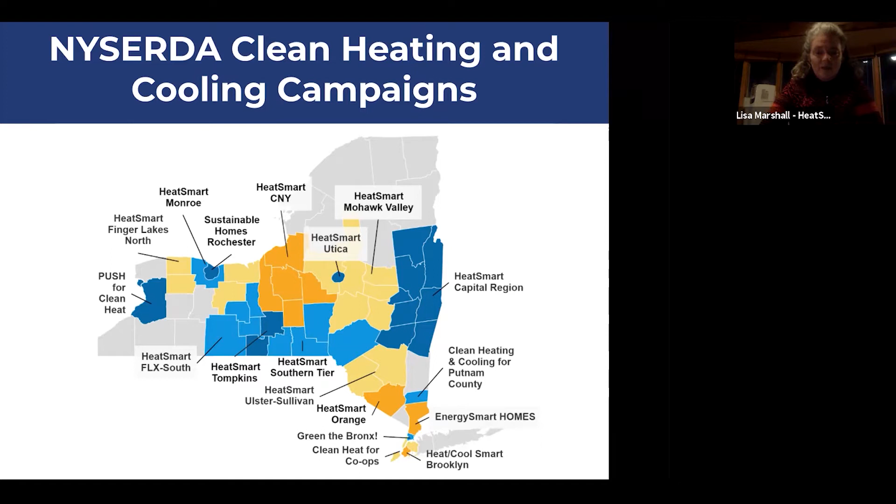There's now HeatSmart Finger Lakes South to the west of us, a brand new program launched last year, and HeatSmart Southern Tier, covering Tioga, Broome, Chenango, and Delaware counties. If you have friends in another county interested in taking part, we can help direct them to the HeatSmart program closest to them.

So why do we need a community campaign for clean heat? It's because we find ourselves in what some call the climate crisis or climate emergency, this rapidly warming atmosphere caused by ever increasing greenhouse gases. Those are the gases that, when we burn things like fossil fuels, go up into the atmosphere and get trapped there, trapping the sun's heat.

We need that greenhouse effect to keep the earth habitable, but the problem is we've been putting a lot more gases into the atmosphere in the past 200 years, and more each year, to the point where it's difficult for our natural systems to adapt. So as a society, a humanity, a state, a country, we all need to figure out how to reverse that trend of increased greenhouse gases and put less of them into the atmosphere.

Here in New York, we passed a law last year called the CLCPA, the Climate Leadership and Community Protection Act. It requires us as a state to reduce emissions from all sectors by a certain amount by 2030, and by an even greater amount by 2050. The problem is no one knows how to do this, they've never done it before, so we're all working together to figure it out.

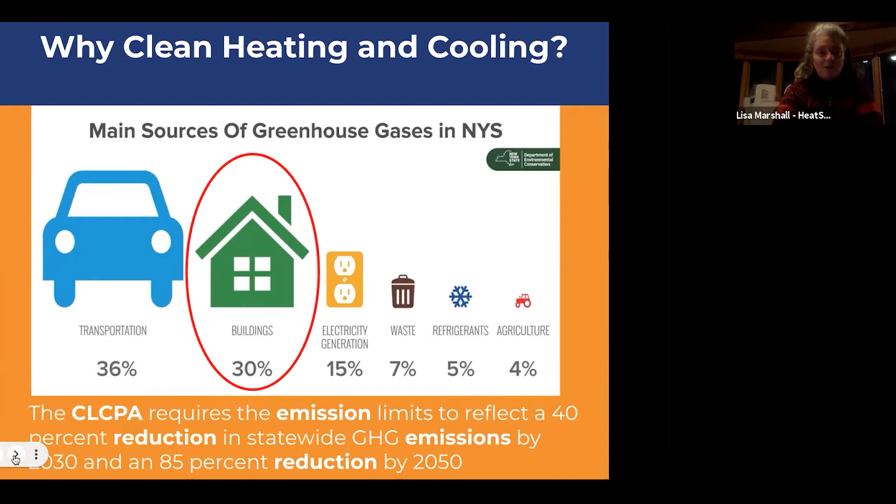One of the biggest sectors is our buildings, because on-site combustion of fossil fuels in buildings is, as you can see from this graphic, about a third of New York State emissions. So if we're going to reduce emissions from our buildings, we have to think about how we use energy in our buildings, because we have to heat them. We live in a cold climate.

It was nice that today was the first really chilly day of the year, and we had this webinar to remind us that heating season is here. If you haven't turned on your heat yet, you probably will soon. Most of our energy use in New York is for heating, with a little bit for air conditioning.

This graphic is from Minnesota, but it's not too different from New York. We also like to look at water heating, which is about 15 to 20% of our energy use. So heating and water heating are the two things HeatSmart mostly focuses on.

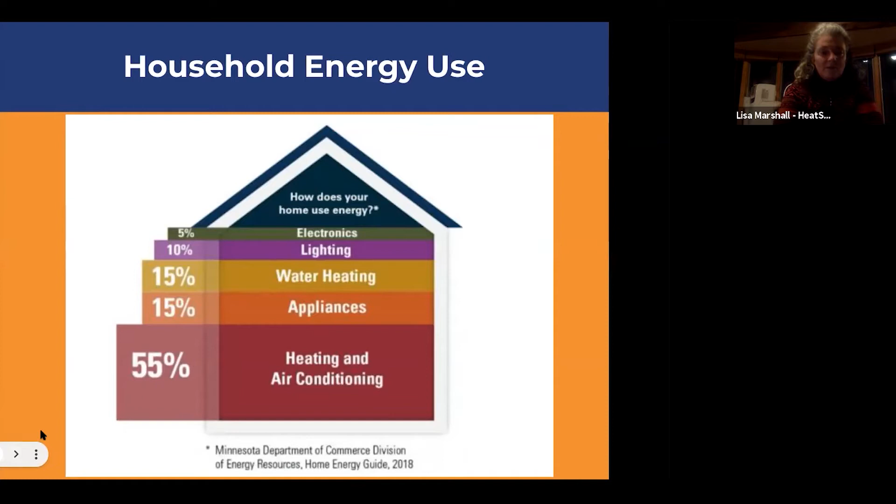So what do we recommend? We recommend having somebody take a look at your building envelope, that is, how well insulated and air sealed your home or building is. The reason is, if you have a well insulated and air sealed building, the warm air from your furnace, boiler, or heat pump will stay inside with you instead of escaping through the roof, ceiling, foundation, or wherever else it can get out. That's really important.

And then the main thing we like to talk about is how to do space heating and cooling, because the heat pumps we recommend are the most efficient way to heat your home.

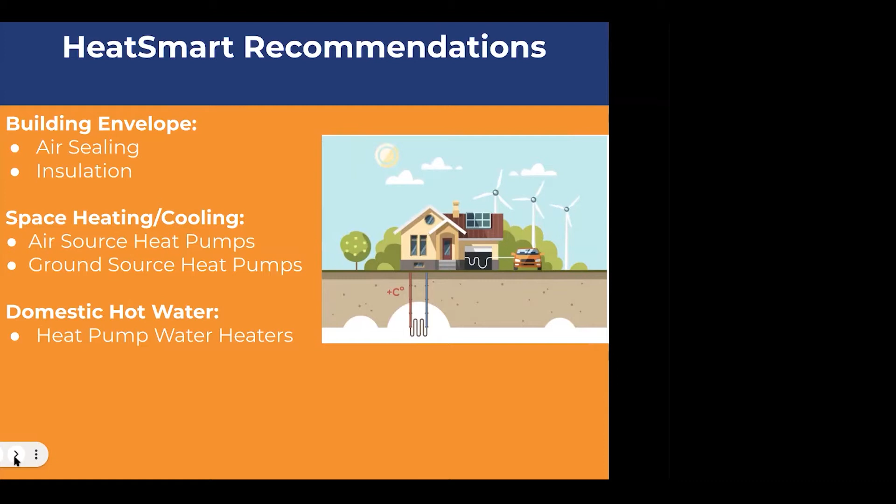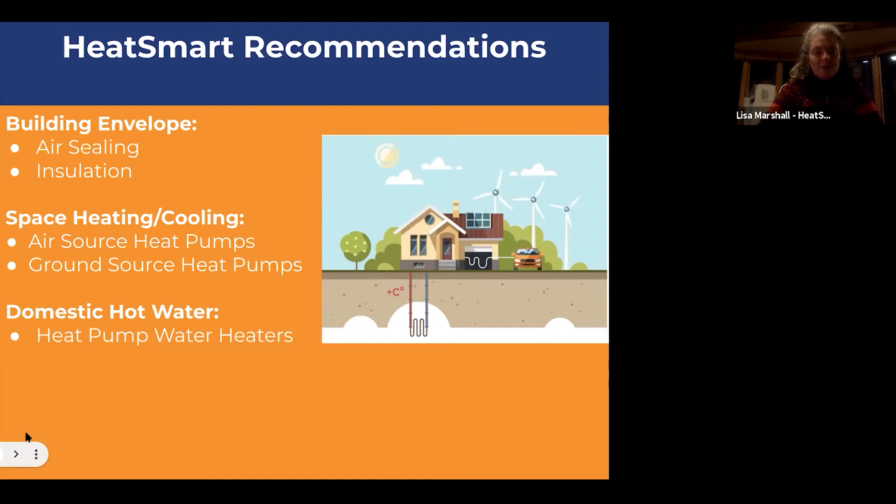So as I was saying, heat pumps are the most efficient way to heat and also cool your building, and there's many different kinds to suit different situations and price points. There's also the so-called heat pump hot water heater, or the hybrid hot water heater, which we really recommend for heating hot water.

So what the heck is a heat pump? Well, you actually already have one in your house. That's the same technology that keeps the inside of the refrigerator cold. If you've ever put your hand behind the refrigerator, you felt that warm air coming out. That's because the heat pump works to move the heat energy out of the refrigerator and keep the inside cold, and it gets vented to the back.

A heat pump that heats or cools your house is really the same idea. There's a closed loop of a refrigerant chemical, and when you put it under low pressure, it evaporates and absorbs heat, and when you put it under higher pressure, it condenses and gives off heat. That simple physics can be used in a number of different ways for this heat pump technology that can heat and provide air conditioning to your house.

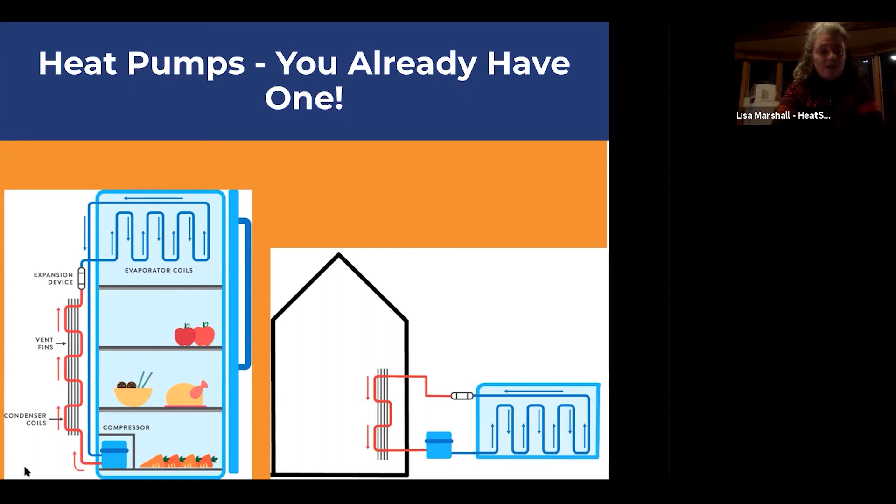So let's look at a couple of those. This slide shows some of the common kinds of heat pump technologies that we see and that a lot of people have adopted after going through our program.

On the left here is a standard air source heat pump. This one's called a ductless mini split. This is the piece that sits outside, and you've probably seen these. A lot of people and stores actually have these just for air conditioning, which is really too bad, because they make a great product, these cold climate heat pumps, where these mini splits can actually provide a whole home heating solution as well as cooling for your house.

This you can see is the refrigerant line. It goes through this line set and then into the inside of the house where there's indoor, either floor or wall mounted heads, that distribute the warm or cool air.

Here in the middle is the ground source heat pump, sometimes called a geothermal heat pump. That's sort of the gold standard of heat pumps. The heat exchange coils go in the ground and take advantage of the fact that the ground is always about 50 degrees all year round. That's a great temperature to extract heat from to warm up your house, or to put heat back into when you're cooling. The ground source heat pump system can also provide your home's hot water.

This is by far the most efficient and long-lasting heating system that you can put into a home or building, with the downside being that the upfront cost is fairly expensive, although there are incentives that help pay for it. And this guy over here is the heat pump water heater that I mentioned before.

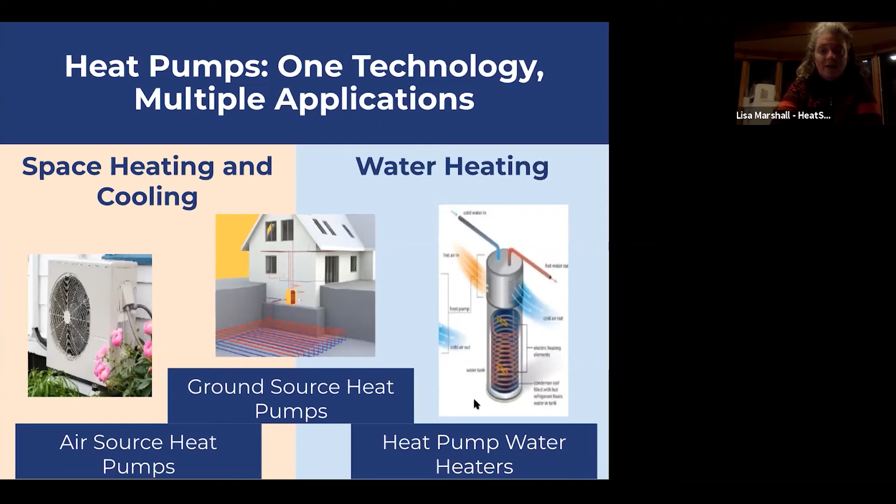So I mentioned cost savings. Here in Horseheads, most of us are on gas, so the cost savings are not very dramatic. But if you know any folks who are, or if you are on propane, electric resistance heat, or oil, the cost savings switching to a heat pump system are really dramatic. It's sort of not whether you can afford a heat pump, but whether you can afford not to get a heat pump, especially if you have an older system and you're looking at the end of life. This is really a great time to switch.

With gas, whether you would save money with a heat pump really depends on quite a few factors: how efficient your gas furnace is, what kind of heat pump you get, how well insulated your house is. You may or may not see cost savings. Some people do switch from gas, even if it sometimes costs them more, just because they want air conditioning or they want to get off fossil fuels in their homes. So people have different motivations. I just don't want to mislead people and say that you're going to save a lot of money by going to a heat pump off gas.

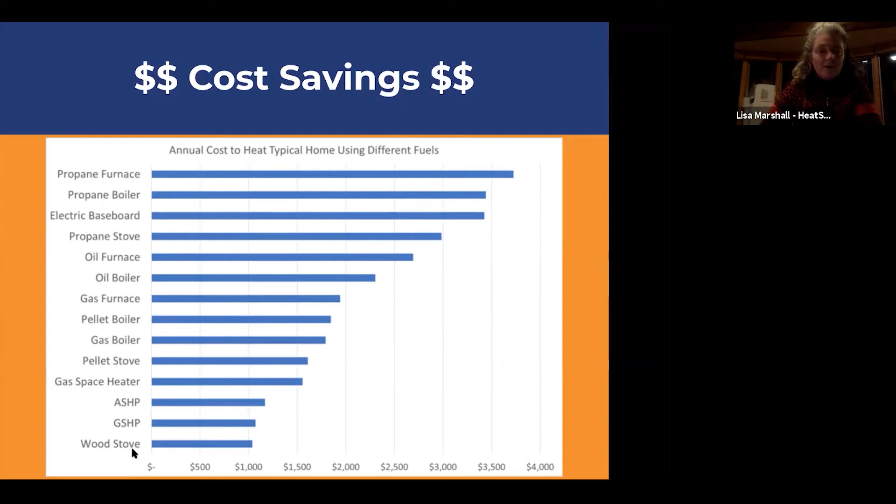New York State, as I said, is invested in helping you get onto heat pumps. They ordered two years ago that utilities take on a five-year rebate program, which started April 1st of 2020 -- ironically a bit of an April Fool's joke because they weren't quite ready to do it. We're trying to iron out the wrinkles, but mostly customers don't see that. It's the installers who deal with the hiccups of the utilities.

The rebates are as follows: for ground source or geothermal heat pumps, it's $1,500 back per 10,000 BTU hours of system size. So for a typical person, that's a $4,000 to $9,000 rebate. There's also, through the end of next year, a 26% federal tax credit. So even though ground source is the most expensive, there are some very good incentives to help pay for those systems. For air source, we're really happy there's a $1,000 per 10,000 BTU hour rebate.

That happened as a result of a lot of advocacy that didn't used to exist. Right now there's just a $300 federal tax credit, because for some reason the Energy Department treats an air source heat pump like another appliance instead of a heating system. That might change in the future, but that's what exists now.

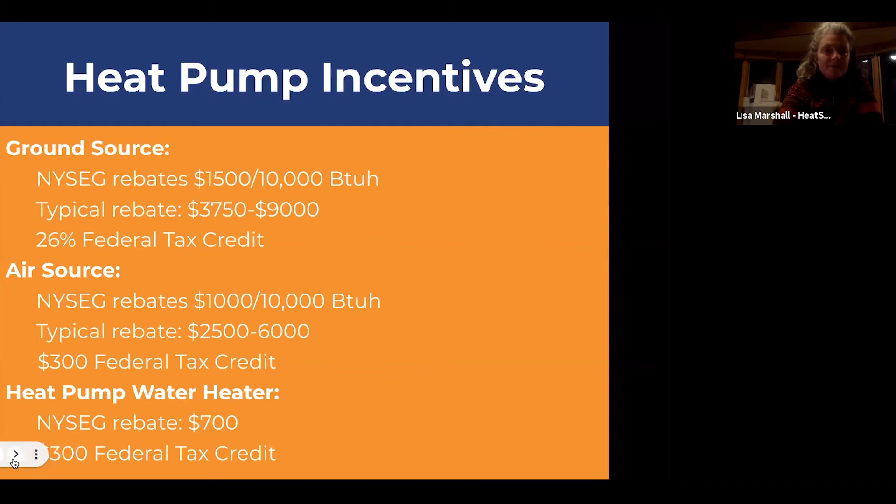For that heat pump water heater, there's a $700 rebate and a $300 tax credit, so $1,000 off the price. If you were to get a heat pump system for your home and a water heater at the same time, this rebate goes up to $950. These incentives are available to everybody, regardless of income -- as long as you are a ratepayer, a NYSEG customer, and a taxpayer, you are eligible for these rebates. In addition, there are some income-based grants to help pay for insulation and air sealing.

And sometimes, depending on the circumstance, these can be applied to a heat pump as well. So you'll have to talk to me and to an installer about whether that would pertain to your situation.

Also, if you don't income qualify for either of these programs, there's the Comfort Home program that offers some small rebates for insulation. I actually just got a $2,500 rebate on an insulation job I contracted for, on a home in Rochester where our daughters live, and we got the Comfort Home rebate.

When you're involved with the HeatSmart program, we can also offer some additional grants through the Finger Lakes Climate Fund that get added on to these other grants. Eileen, who's going to present after me, will talk a little bit more about these programs.

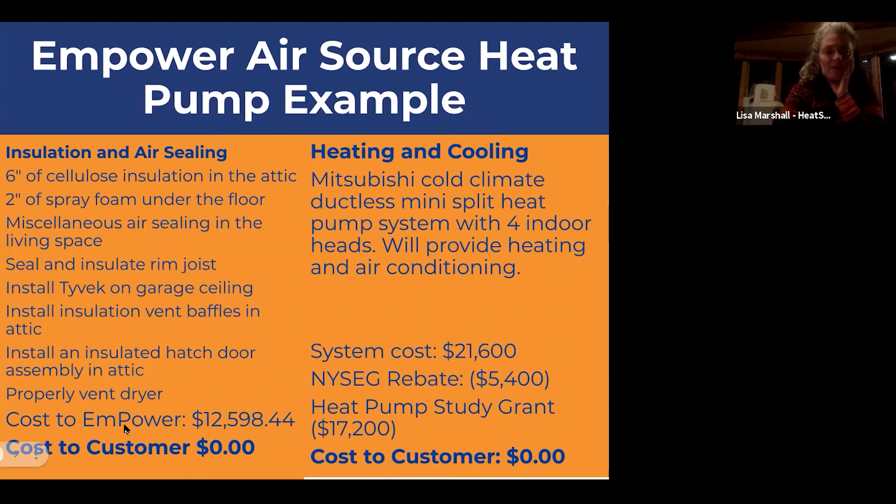If you don't qualify for free stuff, because not all of us do, financing is available, and there are several different opportunities. The Green Jobs Green New York financing has an interest rate that depends on your income, so the lowest income earners qualify for a lower rate. There's also a credit union up in Tompkins County that offers energy efficiency loans. And the installers often can offer financing with banks or lenders that they've negotiated packages with, so you can ask them about that.

So I've been mentioning our installer partners.

Installers and contractors have to apply to work with HeatSmart, and they have to have a demonstrated track record of quality work and customer service. They stand by their installations, meaning they service and repair every installation they do. They pay their employees a living wage. They're willing to work as a team with HeatSmart because we demand a lot of them, like doing webinars and presentations with us. They all demonstrate a growth mindset, very interested in learning and growing as the state figures out this energy transition. And they really share our values of trying to make life better for each person they deal with, as well as trying to do this bigger thing of transitioning our energy systems slowly off fossil fuels.

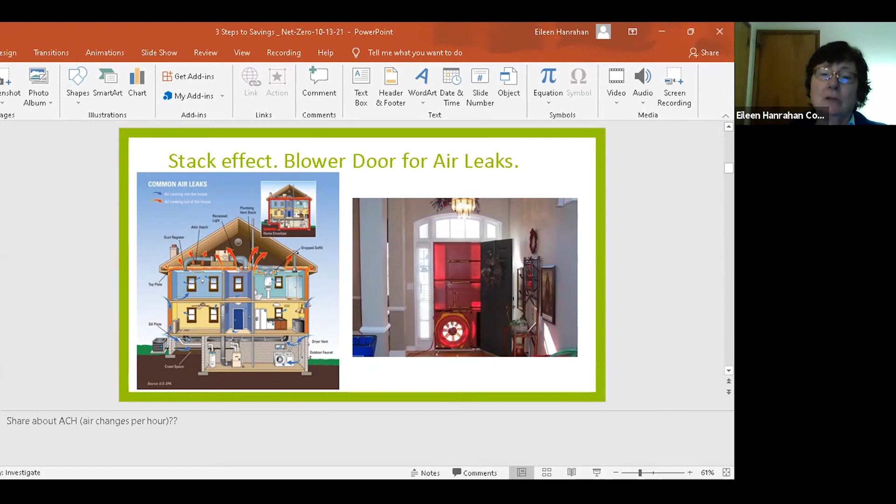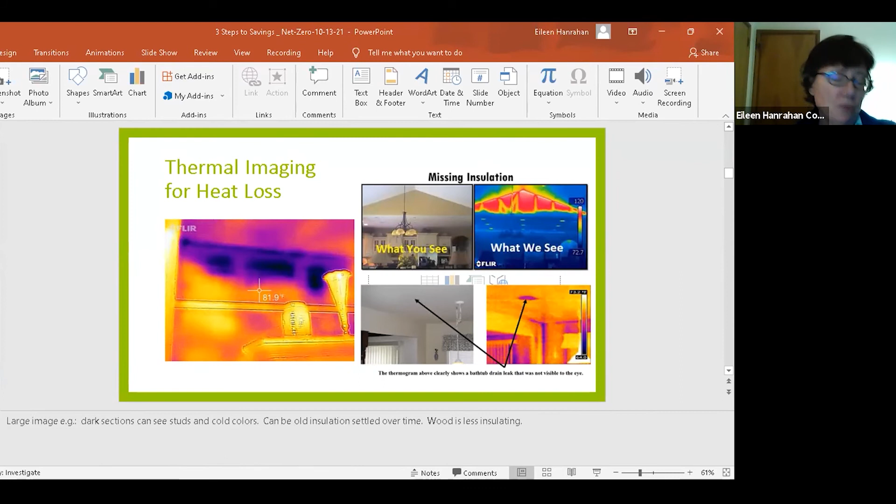I just remember that you wanted me to do this in about 5 minutes, so I've got to wrap this up.

Once the auditor does the assessment to determine your insulation levels in your attic, rim joists, living space walls, and any other energy inefficiency with heating systems and hot water heaters, they bring their teams in to do the work needed to make your home more energy efficient.

If you're Empower eligible—low income, median income, or higher income—there are incentives available. If low income, you can get up to $10,000 of grant funding. If median income, up to $5,000 of matching funds. If higher income, anywhere from about $1,000 to $4,000 for prescribed work.

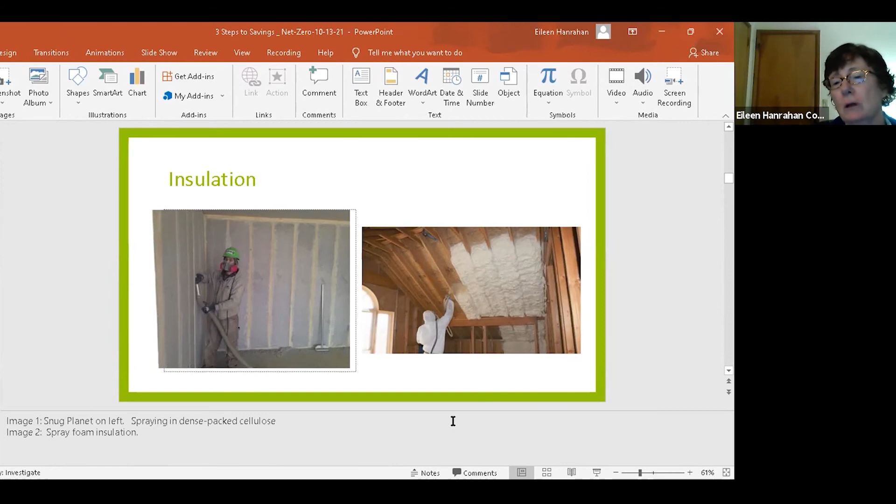Lisa mentioned the income eligibility for the Empower program. Many New Yorkers qualify, so you can get very significant home energy upgrades done for free. With the Assisted Home Performance Program, many New Yorkers are also eligible to get matching funds up to $5,000 towards home energy upgrades.

This is a quick success story: this gentleman used to keep his house at 74 degrees, and it was still very drafty. He had icicles so big they reached down to his hedges, damaging them. He went up on his roof to break them off and fell, breaking his back.

Halco, I believe, was the contractor that did the home energy assessment and performed upgrades—insulation in the attic, rim joist, and more. Now he's saving a ton of money on utility bills, keeping the house at 68 degrees, six degrees less than before, with the same comfort and warmth. He's very happy with what was done.

That's what I'll wrap up with, unless anyone has questions.

Let's go to introduce—thank you so much, Eileen. We'll do Q&A for all of us at the end. I'm going to go next to Gary Chalet, a friend and neighbor of mine up above Horseheads, above the village. Gary was at a presentation Eileen and I did at the Big Flats Community Center about a year ago—time no longer has meaning—but Gary went through the HeatSmart program, so I invited him here to give a testimonial, and then we'll take questions at the end. Thank you, Eileen, so much. So take it away, Gary, tell us the story of your HeatSmart journey.